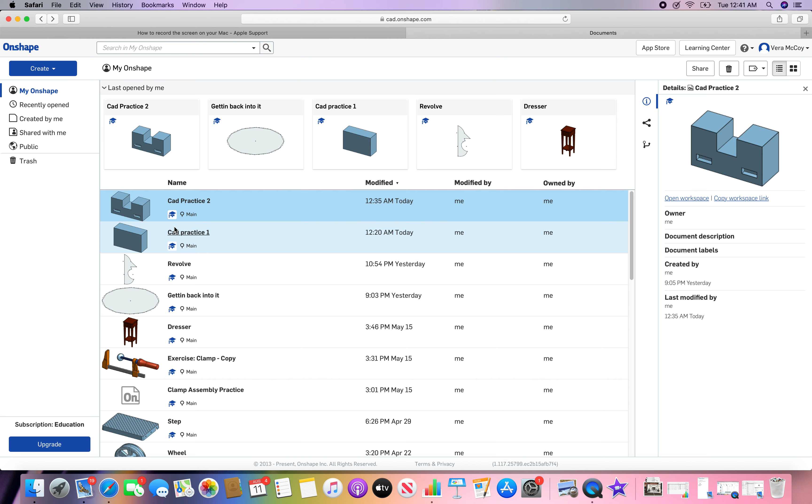I've already got a document created, CAD Practice 2. Today we're going to be working on extrudes and removal extrudes. This is the shape we want to make. It has two little indents, so those are removal extrudes, plus a removal extrude up here, all on one large extrude.

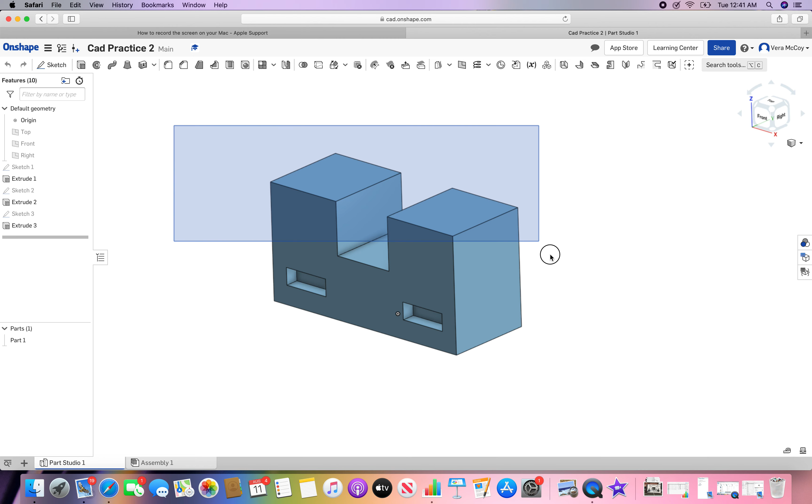So let's get rid of this, get it out of my way so we can remake it. I'm going to delete these sketches so we can go all the way from the beginning.

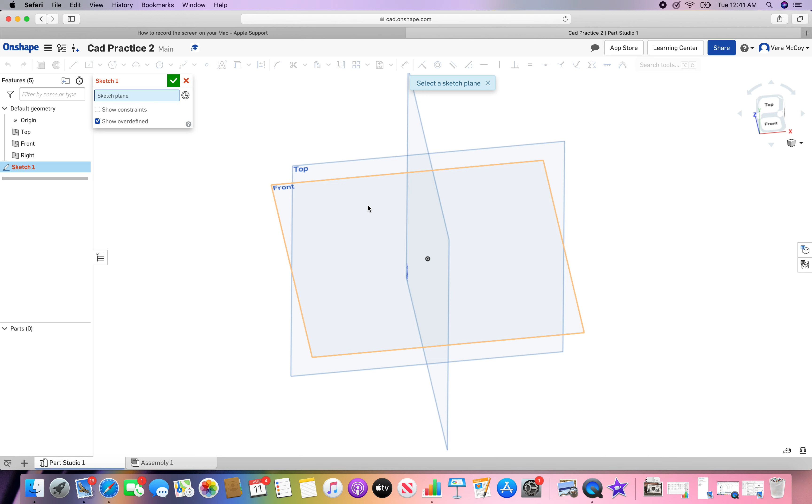Okay, first up we always want to start with a sketch, so we'll start with sketch 1. I want this to be on the top plane. Now that that's selected, we can go to normal view using the shortcuts N and P on our keyboard. Normal view, get rid of planes.

We are going to be using a center point rectangle. There are two kinds, a corner rectangle and a center point rectangle. We're going to use a center point rectangle for this. So this is the origin.

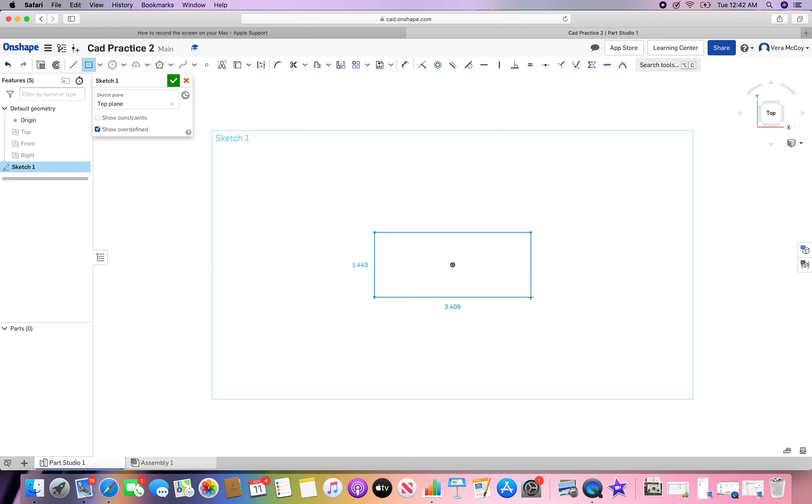This is kind of where all the planes cross. It is the center of your workspace, and it's really good to center things off of that if you're going to be working with a lot of center-based items. So we are going to use that as our center for our center point rectangle. Once that's done, we are going to accept the sketch.

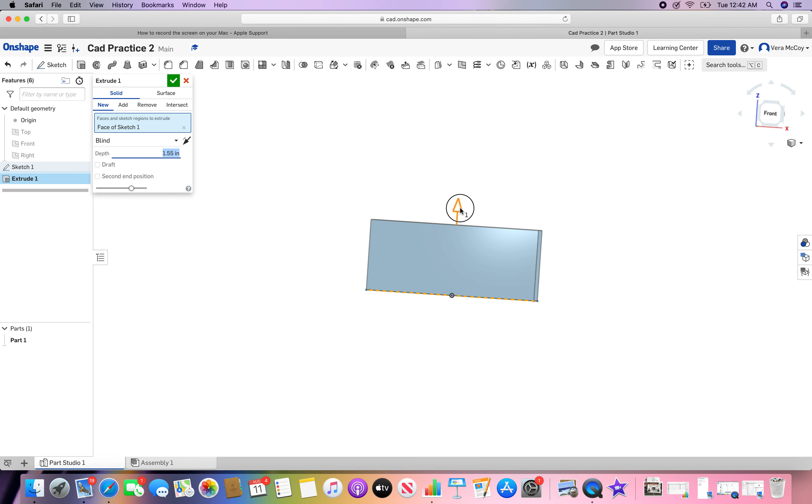Now let's extrude. We click extrude up by the sketch button. We need to pick a face to extrude, that's this one, and we can drag this up or enter it in, but I'm just going to drag it. Let's make it a little taller. We're not really concerned about measurements right now. Let's click OK. Cool.

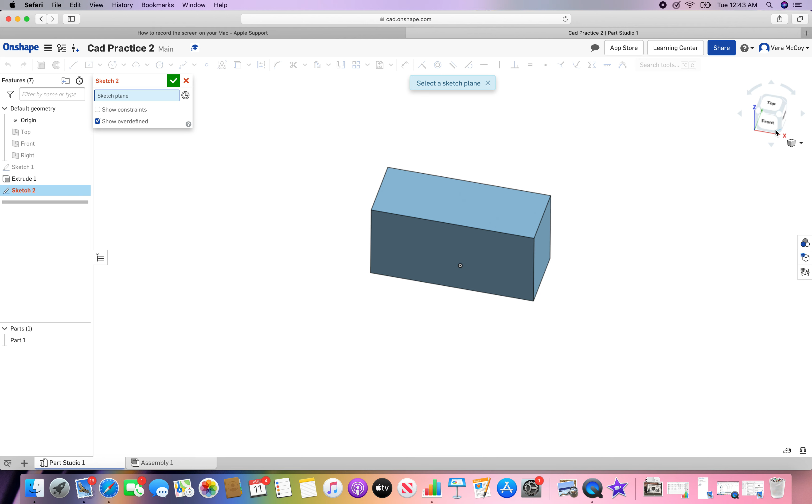Now we're going to do another sketch, but this time it's for that removal piece, because we have to remove this section out here, this block that needs to be taken out. So we're going to start another sketch by clicking Sketch, and now we need a face to work off. Instead of using the top, right, or front plane, you can create a plane by clicking on a face of an item. So I just created a plane for sketch 2 by clicking on this face.

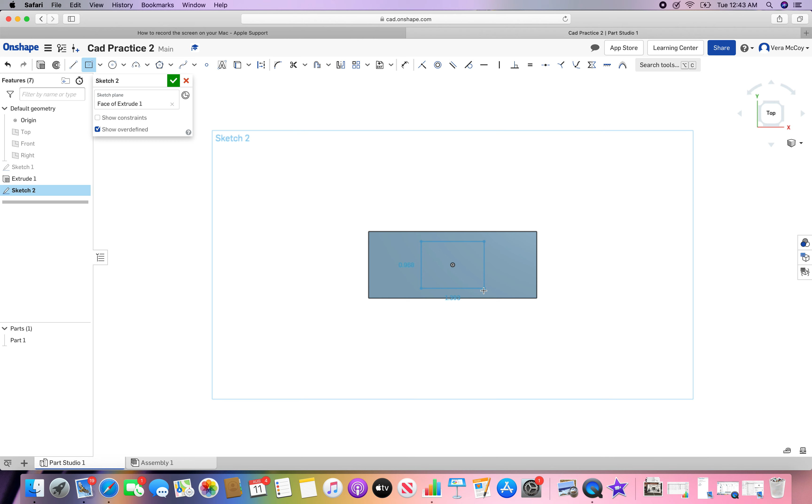Let's go back to normal view and do another center point rectangle. Now you want to make sure that it joins up with the edges here, so make sure it turns orange on the edge where you have it, and then let go where it's still orange. Okay, let's accept this, and now we have a section there to cut out.

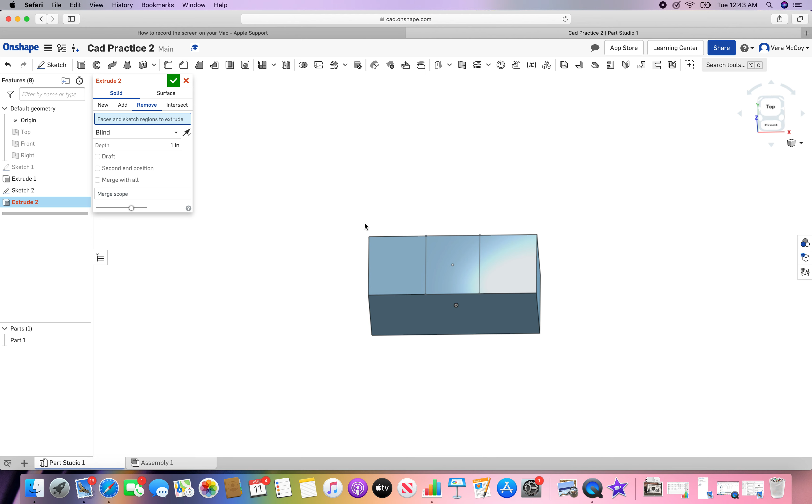So we'll pick extrude, and we'll say remove extrude this time instead of a solid. We're going to do remove, click on this, and you see it automatically goes down. If it were to go up, just click the arrow. It'll probably automatically go down, but just in case. I'm going to make this a little shallower.

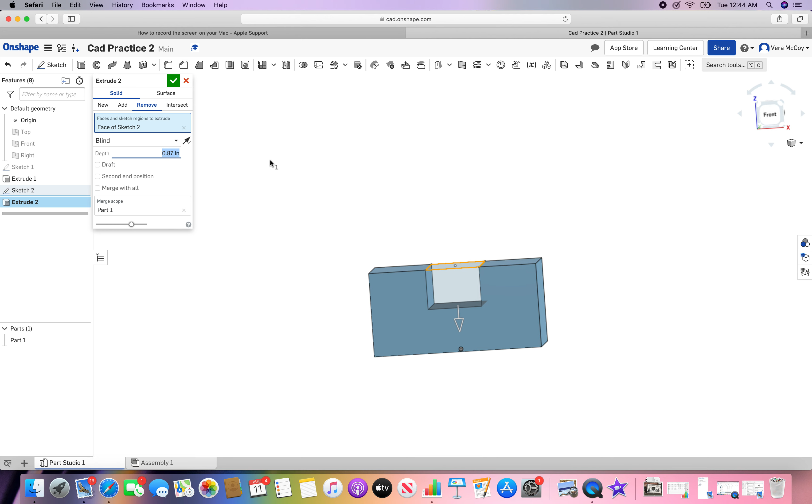Beautiful. Okay, make sure it merges with part 1 — that's the earlier extrude. Just make sure it merges with that, because otherwise it might not fully take effect. So we're going to accept the extrude with the little green arrow, and we are almost done. We just have to do those two little indents.

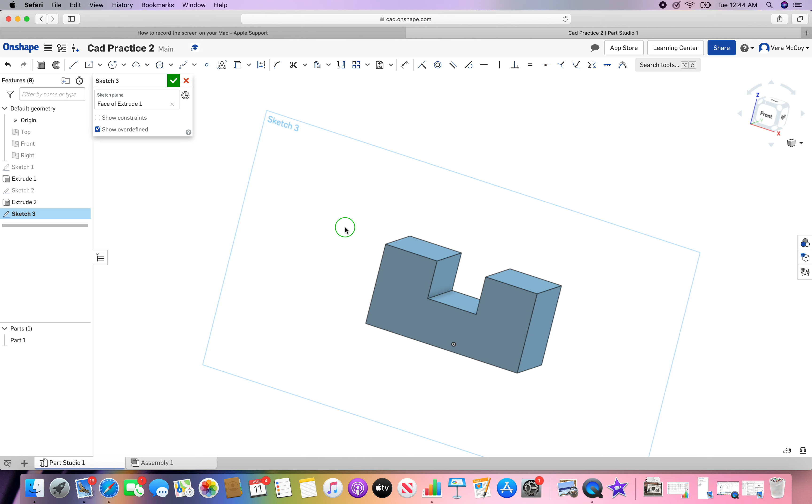So we're going to start a sketch, and we're going to use that trick we learned about planes as faces. We need a plane, and we're going to choose the front face — well, the front face of this block, not the actual front plane.

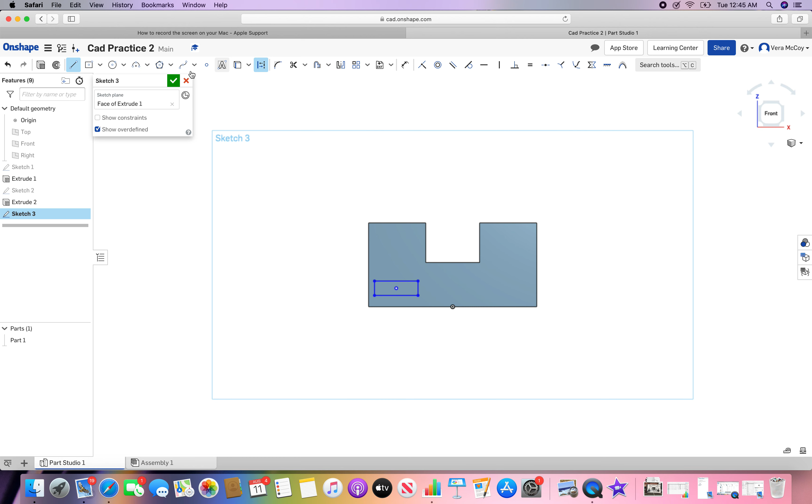Okay, so now let's get a normal view, and now I'm going to do a small rectangle that is going to go right here. Beautiful. Now I'm also going to draw a line, so I click on the line tool, which is right here, and the construction line tool, which is right here. Basically, the construction line tool just means that it'll be a dotted line.

Now I'm lining this up with the origin since we centered the rectangle earlier, so that'll work out pretty well for me, because that way I don't have to worry about making sure that it's centered. I use Escape to get out of the line tool.

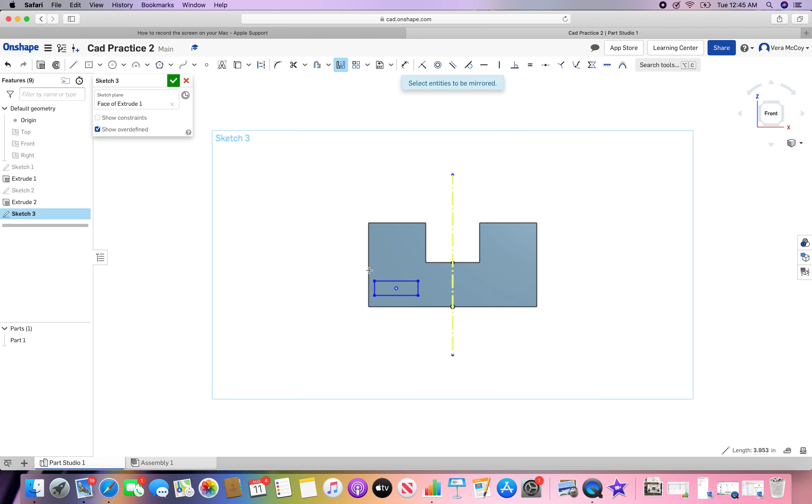Now I'm going to mirror this design, so first we need to select a mirror line — that's why we put this here. Now we are selecting the entities to be mirrored, so that's those, and there it goes. We can deselect mirror, delete this line just to get it out of our face, and accept the sketch. Perfect. So let us finish this.

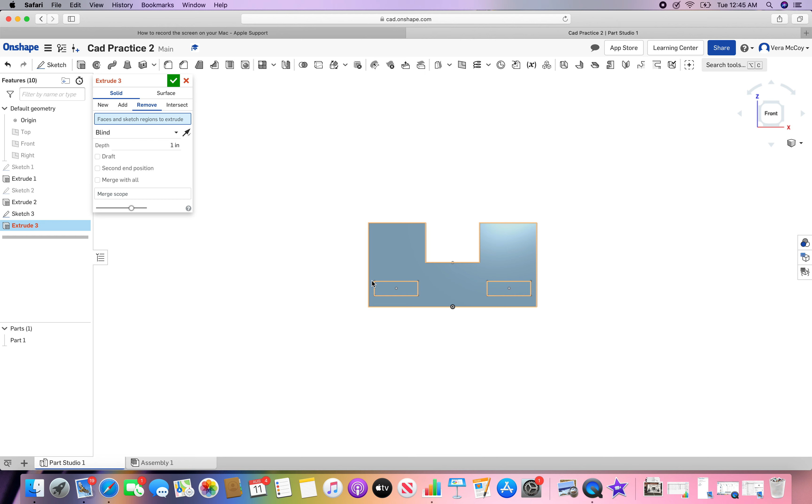So we're going to do one more extrude, and it's going to be a removal extrude. It's going to be here and here. Now you see that's kind of deep, so I'm going to make it a quarter inch and see how that goes. I hit enter and that'll show me what it'll look like, and I like that.

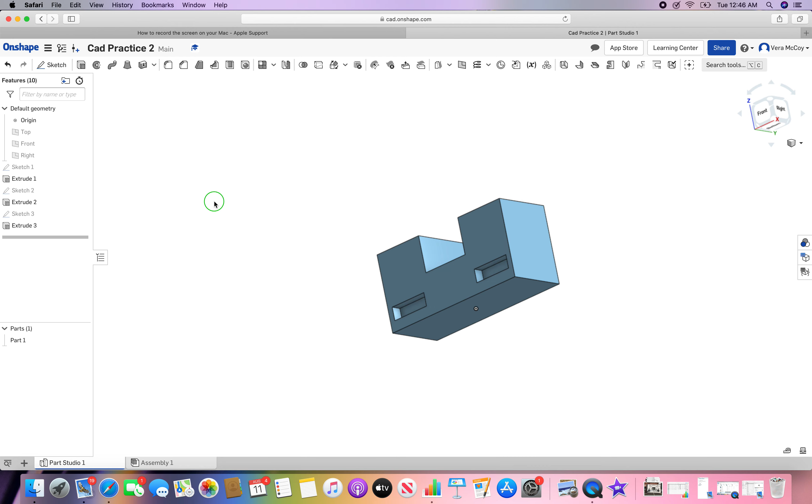It's merging with part 1, it's a remove, and we're good. Accept. And there we go. It's not exactly like the piece we started off with, but I'd say it's close enough. We're not really doing measurements right now, so as long as it's the right shape and has the same features, I'd say you're good.